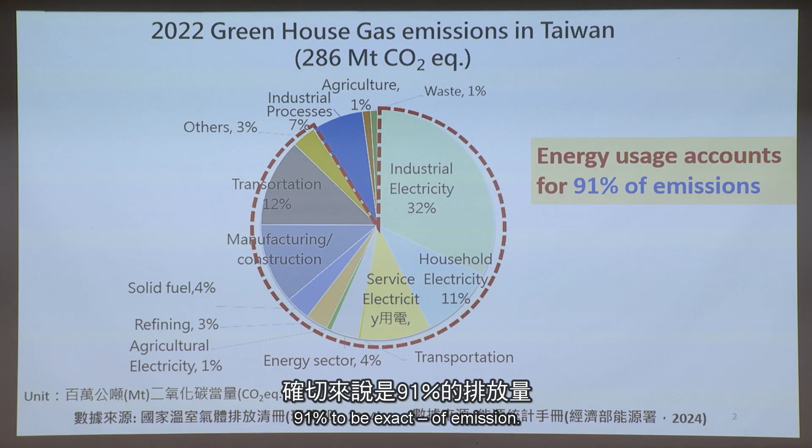manufacturing. Here we see industrial electricity, household electricity, service sector electricity, manufacturing, construction, this is the energy usage, and transportation only 12%. Agriculture actually surprisingly small. I don't know if it's accurate or not. But the bottom line is energy usage accounts for 90%, 91% to be exact, of emission.

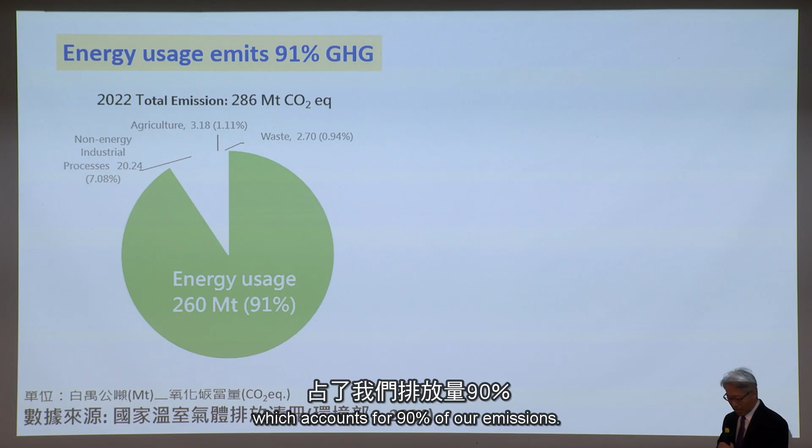Now, let's look at the energy usage, which accounts for 90% of our emission. Among that, we separate electricity and non-electricity. Electricity accounts for close to 60% of emission. So that's why electricity is very important. Professor Chu said it, and Professor Hsieh said it.

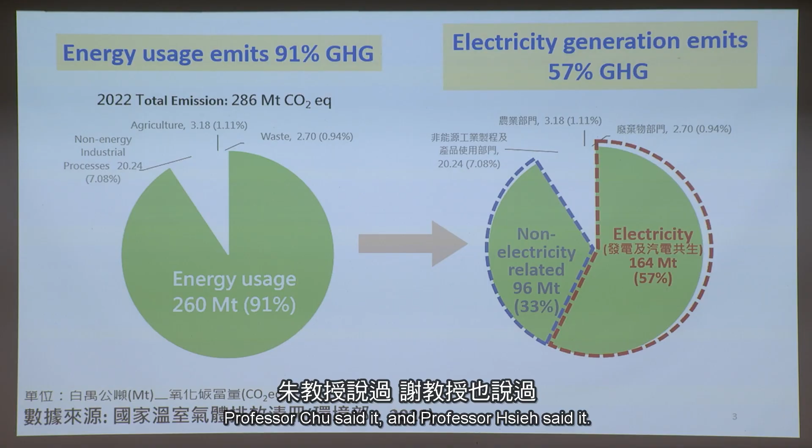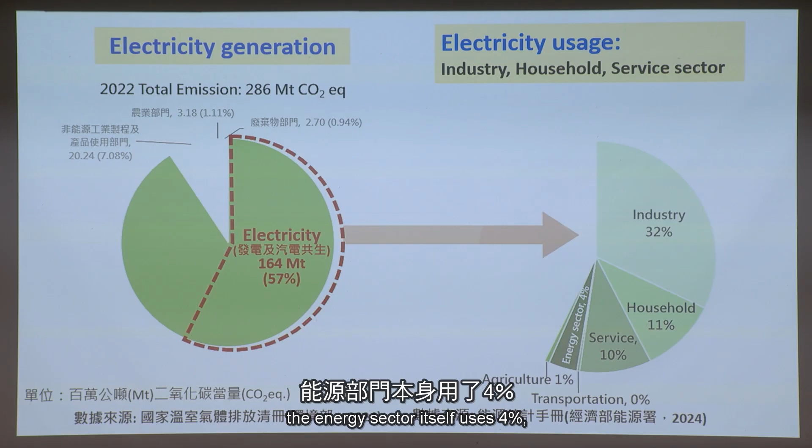Among the electricity, who is using electricity? Industry uses 32%, household 11%, service industry 10%, the energy sector itself 4%, agriculture 1%. Okay? Non-electricity usage, what is that and who is using that?

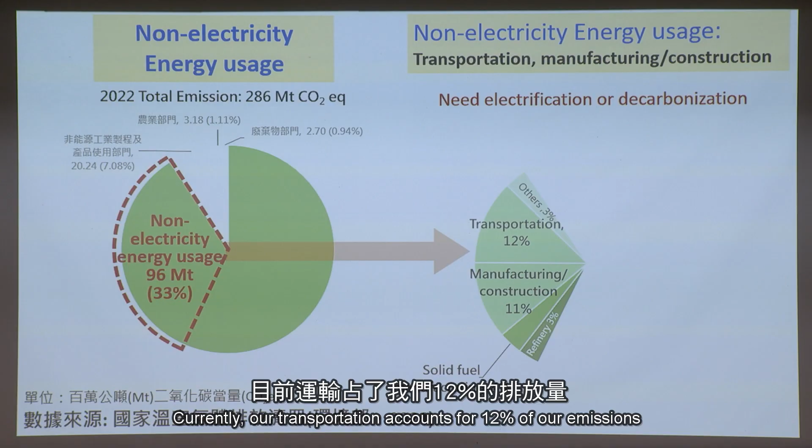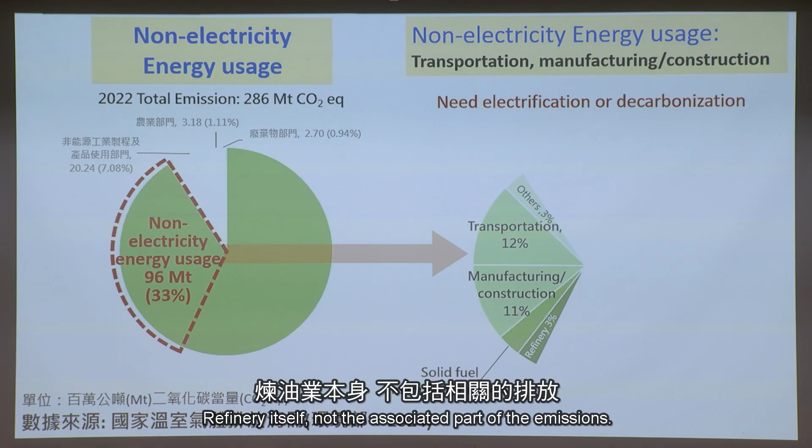That's transportation. Currently, our transportation accounts for 12% of our emissions, and most of it still uses liquid fuel, not electricity yet. Manufacturing and construction, direct burning of coal or natural gas for heat or other energy usage, and solid fuel manufacturing and refinery accounts for 3%. Refinery itself, not the associated part of the emission. So these are the non-electricity usage.

Let's zoom into transportation. In many other countries, transportation emission usually accounts for more than 20%. In the United States, probably 25%. In Taiwan it is 12 or 13%. Road transportation is 12%, almost entirely. Railroad, domestic aviation, domestic marine transportation account for the remaining parts.

In road transportation, motorcycles account for 1.6% of emission. But it's associated with a lot of air pollution, as Professor Chu mentioned. Small vehicles, 6%. So half of it comes from small vehicles; buses, small trucks, and large trucks are the remaining parts. And the solution probably is what we already know, electrification.

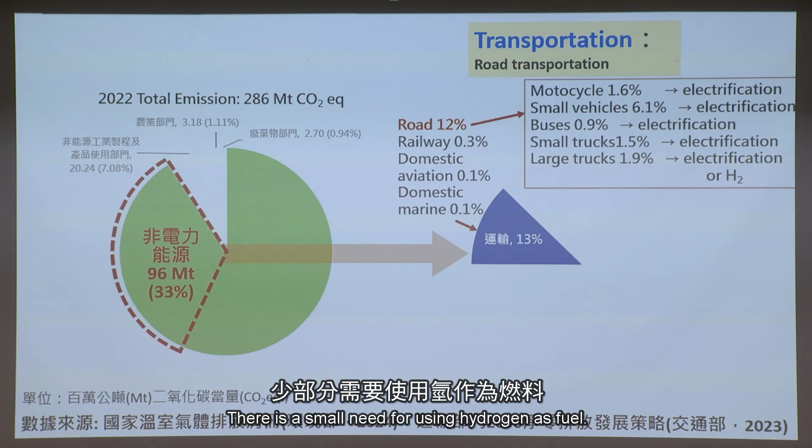Except for large trucks. Taiwan doesn't have long-haul trucks as in the United States or in Europe, but still, we may need that. So there's a small need for using hydrogen as a fuel.

Okay, so the remaining 10%, this is where electrification does not help. It comes from chemical industry, mining, metal manufacturing, semiconductor manufacturing. And in the chemical industry, these are not energy usage. These emissions come from processes. And it's very difficult, or almost impossible, to change the process.

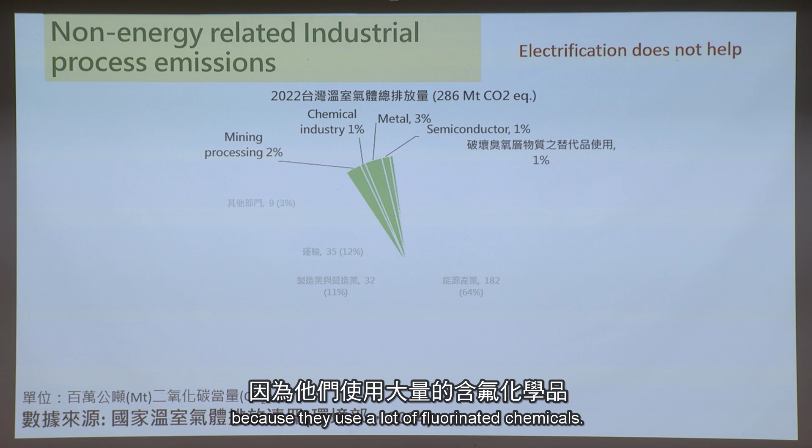Semiconductor manufacturing emits greenhouse gas because they use a lot of fluorinated chemicals. So decarbonization of electricity generation is the key in Taiwan. Okay.

Now, let's compare our situation again with other major countries. Energy usage is the major source of emission. This is true for most other countries. Taiwan accounts for 90%, Germany 88%, Japan 92%, US 87%. So this part is the same.

Among the energy usage, in Taiwan electricity accounts for almost 60% of the emission. Transportation only 12%. Germany 31% and 21%. Japan is closest to us. Electricity accounts for 43%, transportation 17%. And in the US electricity accounts for 28%, transportation 30%.

This may reflect possibly two things. One is we have a strong manufacturing industry that uses a lot of electricity. Secondly, we probably didn't do a good job in decarbonizing electricity yet, as opposed to California, for example.

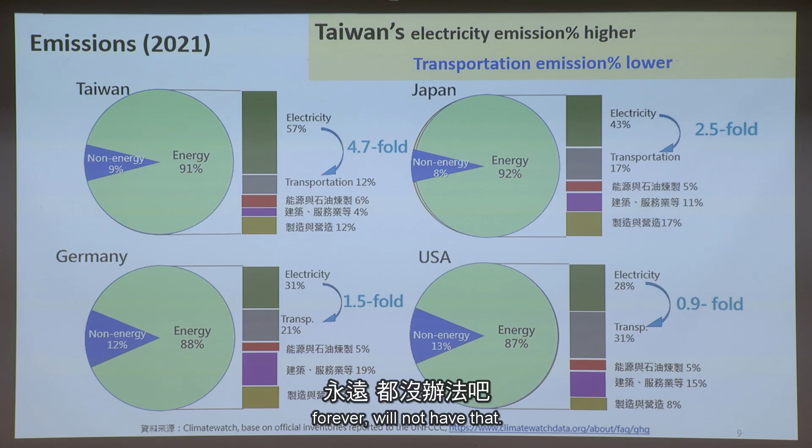Steve just said that California already uses a huge amount of renewables and even has negative prices for renewables during the day, which is totally inconceivable in Taiwan, at least for now. Probably also in the future, we will never have that. I'll tell you why.

The area per capita in Taiwan is this little. The US has 20-fold higher area per capita than Taiwan. Australia is almost 200-fold higher, and we have the same population as Australia. 23 million people live on Taiwan, 23 million people live on the Australian continent.

Okay? We just don't have enough land to harvest solar energy. So this is the difference. This is why we will not have negative prices during the day when you generate a lot of electricity.

And carbon emission factors, this is the CO2 equivalent emitted per kilowatt hour. Okay, Taiwan is about 0.5, middle of the road, a little bit better than China, worse than Singapore, Korea, Vietnam, or Germany, or United States. Okay. So this is where we need to work on. We have to bring down our emission factor in power generation.

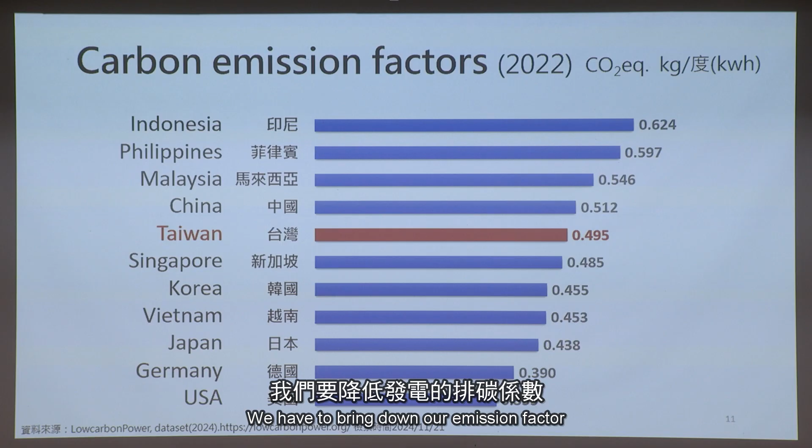So let's look at the electricity. Who's using electricity? As we said, industry uses the majority of our electricity. Household and service industry are less. Who in industry are using electricity? Okay, majority is semiconductor manufacturing, but that's our national security shield. It's called the chip shield, right? So this is where a major part of our national security comes from.

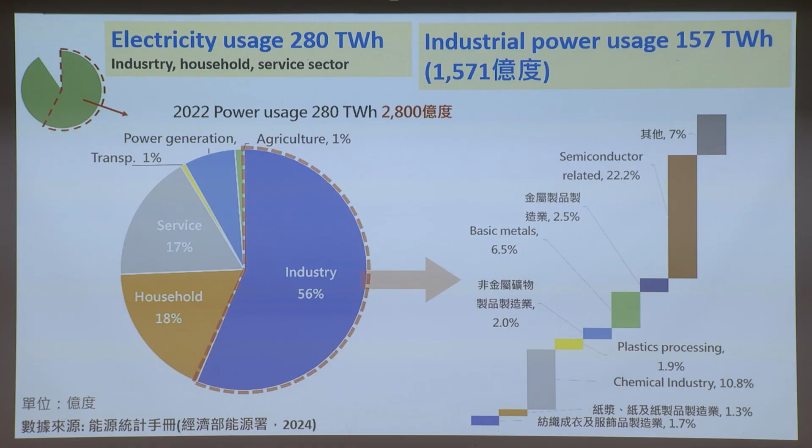Chemical industry also emits quite a bit, about 10%. This is the energy part, not the materials part. And also there's basic metal manufacturing. So these are the big three in industry. And then let's look at the very real problem, okay, in numbers. How much energy do we use? How much electricity do we use?

We use 280 terawatt hour. Okay, each terawatt hour is 10亿度. We use 2800亿度. 2800亿度, 去掉一个零, 叫做 terawatt hour. 280 terawatt hour. That's how much electricity we use.

Where do we get electricity from? Coal, it's 120 terawatt hour. Gas, 110 terawatt hour. Remaining parts are nuclear, this is probably less now. Today, probably zero, because we probably don't have anything now. Renewables, 27. This includes wind, solar, and all other hydro.

So if we want to decarbonize, it's 280 terawatt hour. Even if we expand our wind and solar combined to 1000亿度, 100 terawatt hour, this is probably the maximum we can get in Taiwan in terms of renewables. Plus, if we extend our nuclear power plants, the second and third nuclear power plants account for 31 terawatt hour, or 310亿度. We are still short of about 150 terawatt hour that needs to come from somewhere.

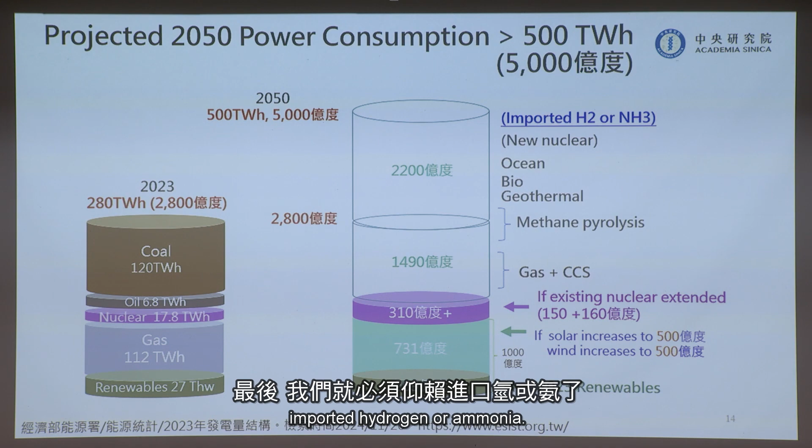Not immediately. And then the rest, we have to rely on new nuclear power plants. Even if we cannot satisfy that, maybe SMR will probably come earlier. And then very last, we'll have to rely on imported hydrogen or ammonia. Okay, so this is what we propose in our policy recommendations. These are all the possible technologies.

So this is the methane pyrolysis to produce hydrogen, and we use the hydrogen for power generation and use the solid carbon for materials. And even, as Steve mentioned, you can make it into carbon conductors that can replace copper. Of course, it's not carbon black, you have to process that, but you have the raw material. It's a very pure carbon, okay?

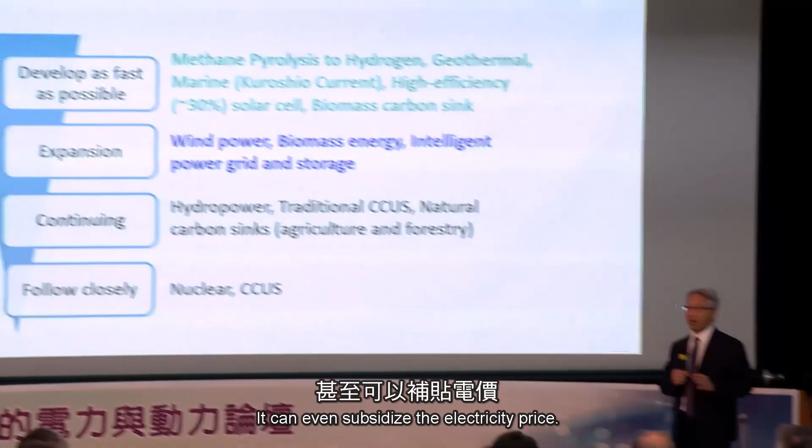If the whole world is using this, we will have too much carbon. But if only Taiwan is using this, we make a lot of money, okay? It can even subsidize the electricity price. Geothermal, as I mentioned, marine and high efficiency. By high efficiency, I meant more than 30% efficiency, which in a small area we already accomplished yesterday in our lab, but we need to scale it up.

And biomass carbon sink. And of course, all these things are what we are already doing. And then we have to think about whether we want to continue nuclear or build new nuclear power plants, or new CCUS possibilities. And the rest, I don't have time to talk about, so I will stop here for further discussion. Thank you.